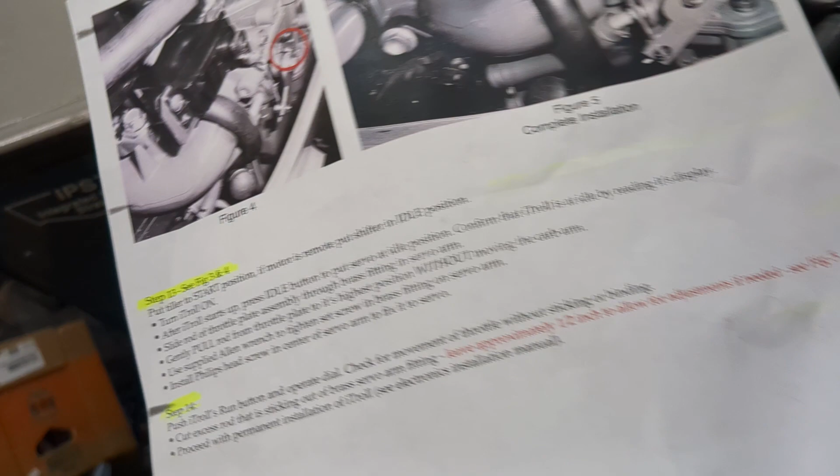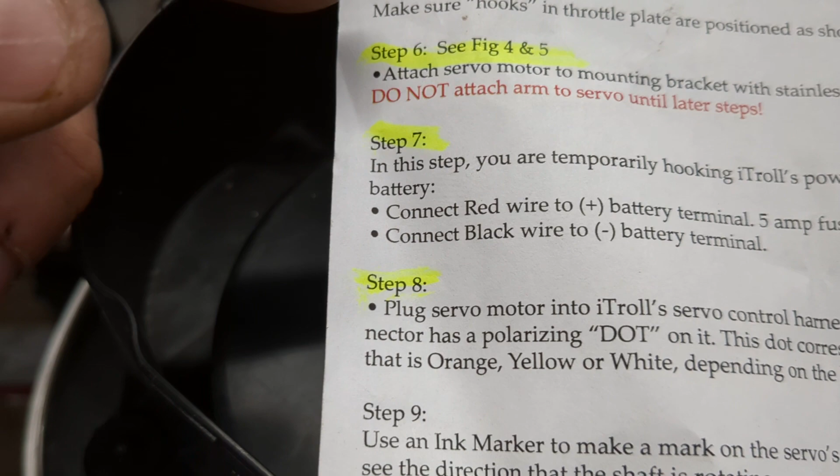All right, this is going to be part 3, which is actually going to end up being step 6, which is going to be figures 4 and 5, which if we flip this guy over, 4 and 5, putting that on, and 5, adding the servo. So, we're going to attach the servo to the bracket with the stainless steel screws.

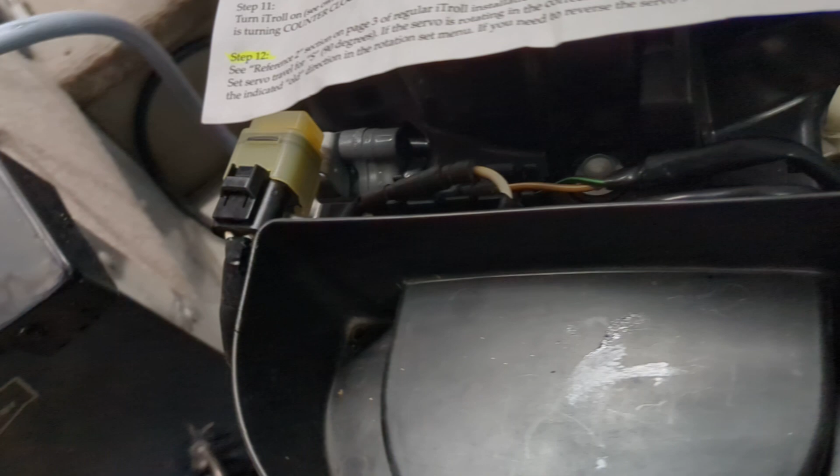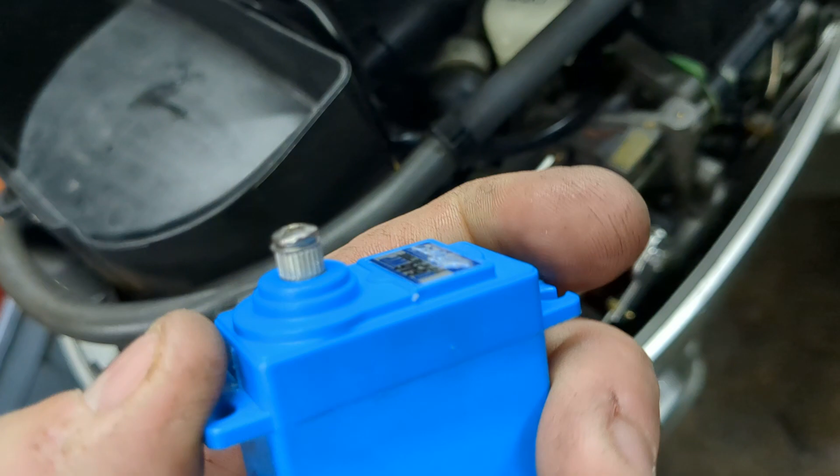However, they've run an update on this particular model. The older ones were just a standard metal gear servo that you would see in a lot of RC stuff. Today, they're sending it with a waterproof servo, which is just a little taller. And we need to mount it on the back side instead of the front side like they showed in the manual. So what we do need to do is we need to trim off these 2 triangles.

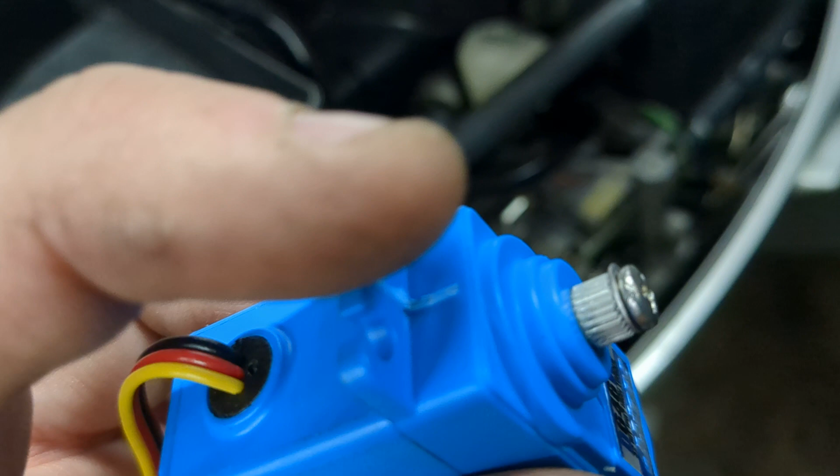There was a triangle here and a triangle here. And we just used a pair of flush cuts just to cut them. You could use a razor or anything. They're showing them on the old metal gear, cutting that off. And they explain why they did it, and also that there are other videos online about this.

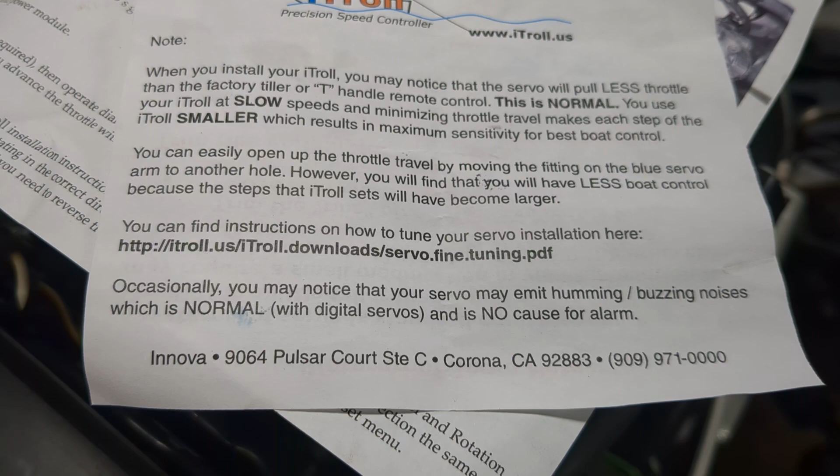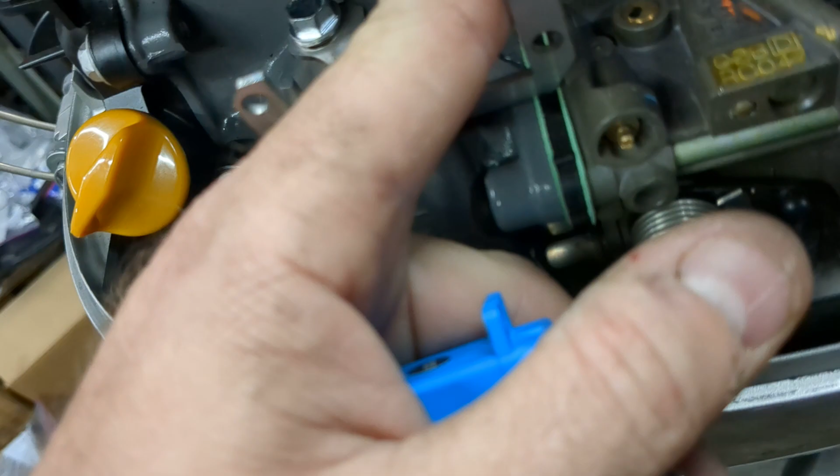So that, once it's in there, it's going to be a tight fit on the back side of some of these wires, particularly this here, which is going to our automatic choke, or this here, which is going to our oil pressure sensor. So however it does fit, we just need to slide him in here as such.

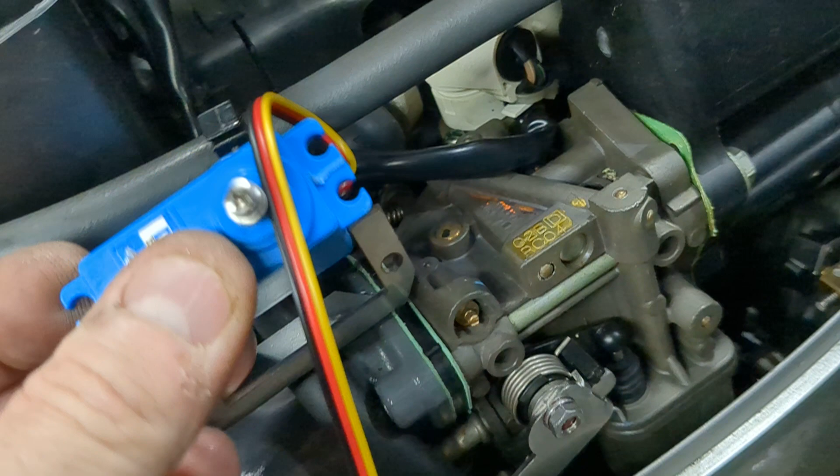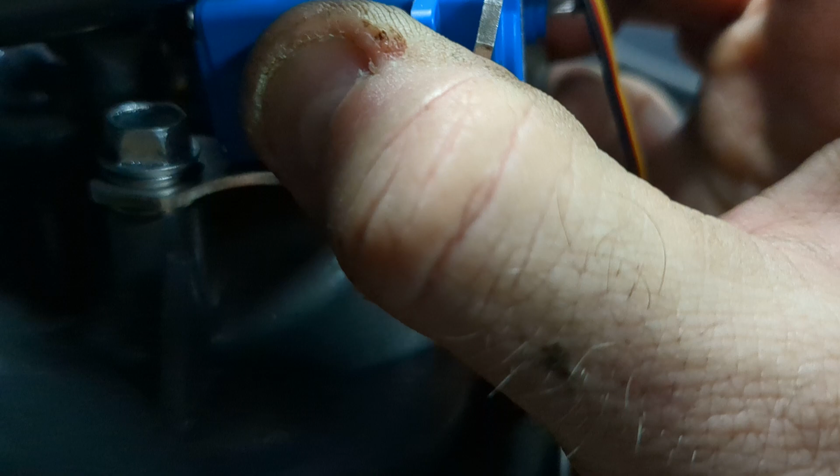Give it a light push, and then on the back side here, you're going to see how it's kind of in there lopsided. We're going to pull out a little bit and pop it into place, and you'll see how it will sit up against there, and then once we bolt it down, it'll be out here. So we also want to make sure that the servo is generally straight with the carb, and it is.

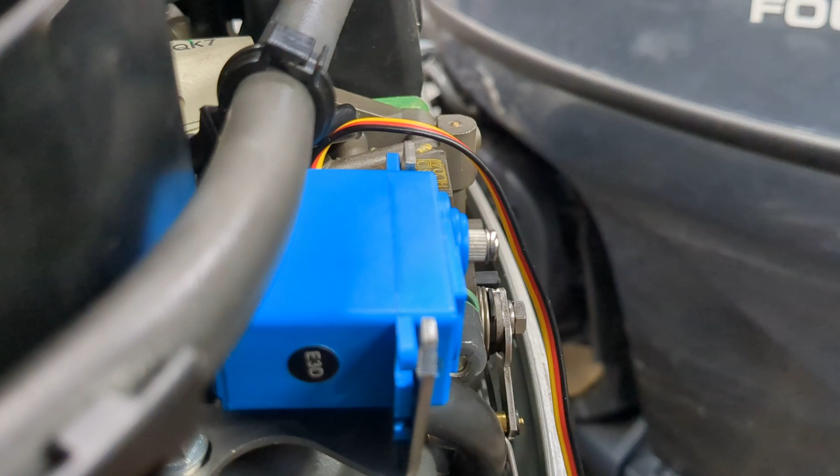So at this point, we're going to go ahead and put the screw in here, the screw in here. We're going to put the screw heads on the outside, the nuts on the inside, and then we will move on to part 4, which is also going to be step 7.